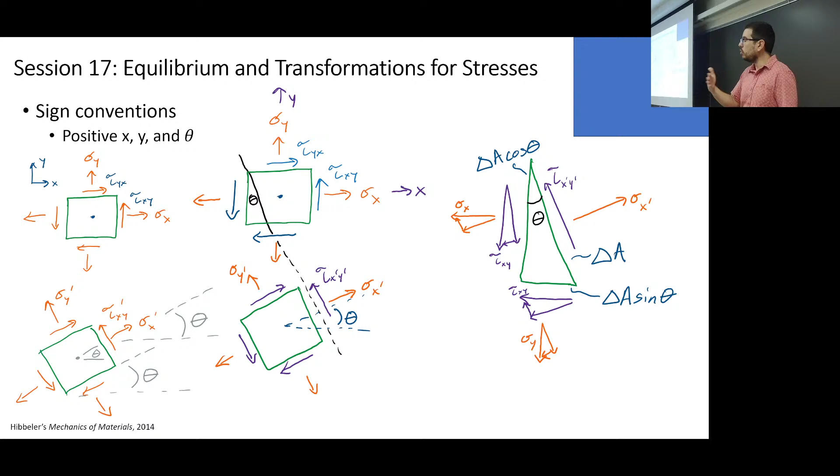We talked about these equations, this general form of plane stress transformation, and the three equations you can use if you do not want to do the method of slices. Today, or this week, in most cases, what you'll be able to do is not even think about these, but use Mohr circle.

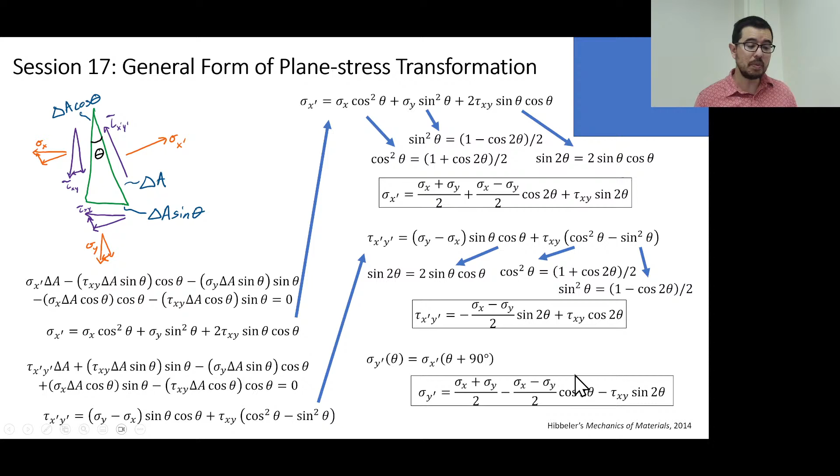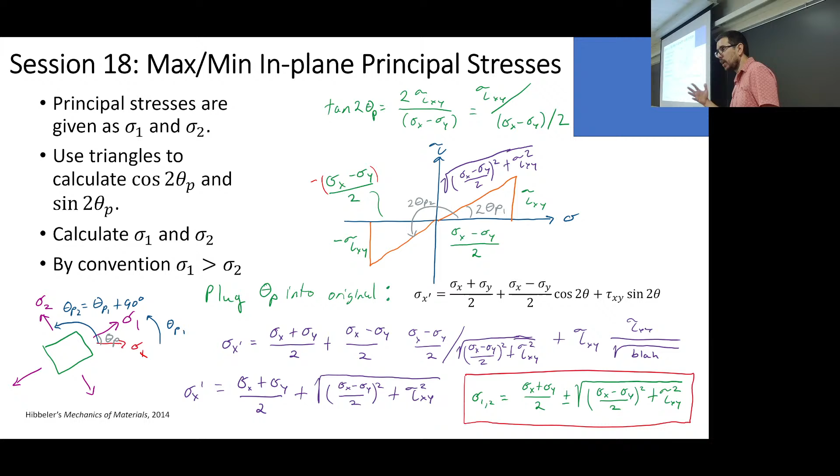We've also talked about the max and min in-plane principal stresses—in plane, big deal. We're going to talk shortly tomorrow about what happens in the 3rd dimension. It's very simple once we know how to use Mohr circle. But this is not the same thing as the absolute max or min for stresses. We're going to cover that tomorrow.

With Mohr circle, it goes back to someone named Christian Otto Mohr, before the 1900s, 19th century. Essentially this is a methodology, a graphical methodology based on geometry or trigonometry, to be able to visualize what happens to the state of stress for an element under rotation.

So it's a visual way to come up with rotations, and it's not too dissimilar from what you do in pre-cal or trigonometry, where they teach you the unit circle. It's like, oh yeah, now I know how to calculate the sine of 45 degrees, the sine of 60 degrees, the tangent of whatever. It's the same idea—I rotate an element and look at the unit circle. I rotate by some angle and look at Mohr's circle instead, and I can tell you what's happening to the state of stress.

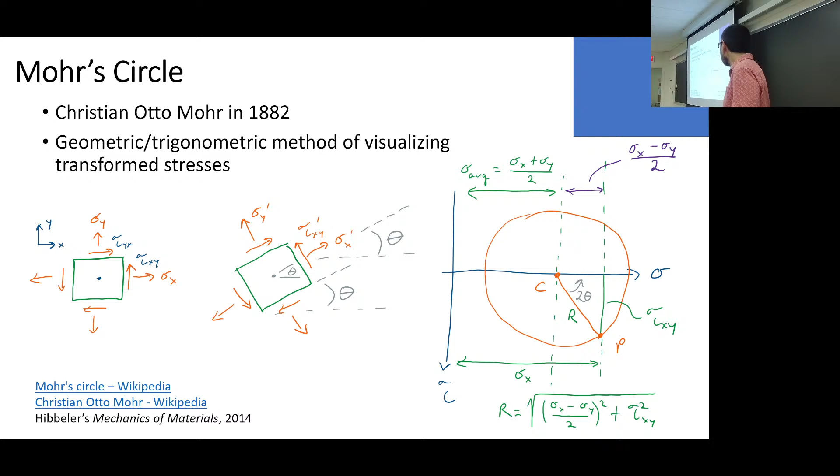So the derivation is actually not that complicated once we use the general equations that we have for sigma x to sigma x prime and tau xy to tau x prime y prime. So you start with two of these equations.

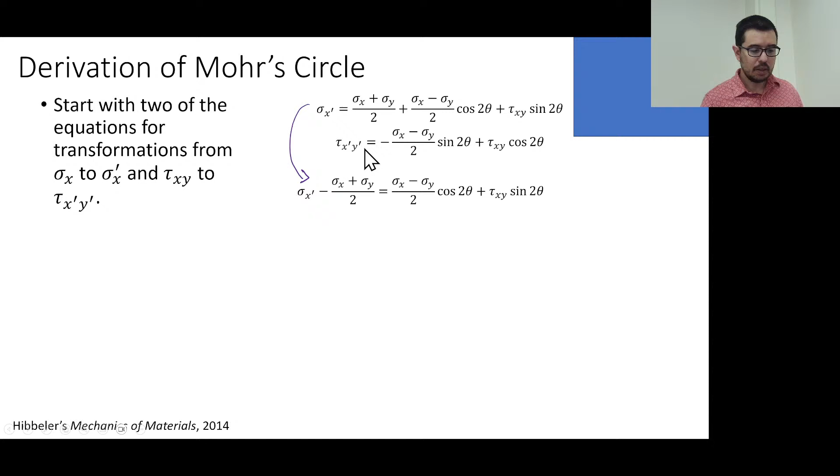There's one for sigma x prime, and there's one for tau x prime y prime. And then you move one part of this equation over to the left side, like you see here. So this is just using the first equation, and now we have this quantity over here and this quantity over here.

You square both of these equations and you add them to each other, and you get this big monster of an equation.

Now we can simplify this equation. You see that this expression and this expression right here, they knock each other out. Well, actually, no, they don't. There's some algebra that happens. They don't exactly knock each other out, but you can begin to see that we can simplify the expressions that we have here to get the following, with these cosine 2 theta terms, sine 2 theta terms, and things of that nature.

So this is the equation. And you're like, well, it's still an equation. What's the format? What's the standard form for a circle on Cartesian coordinates on an xy plane?

Forget what you see here. Just what's the standard form? X squared plus y squared equals r squared. Exactly, right?

And if I want to specify a center that's not at the origin, what do I do? So what you just did is x squared plus y squared equals r squared, right? That's right at the origin. So what do I do? How do I modify it? X plus or minus something squared. Right, so if I wanted it at 1, 1, it'd be quantity x minus 1 squared plus quantity y minus 1 squared equals r squared.

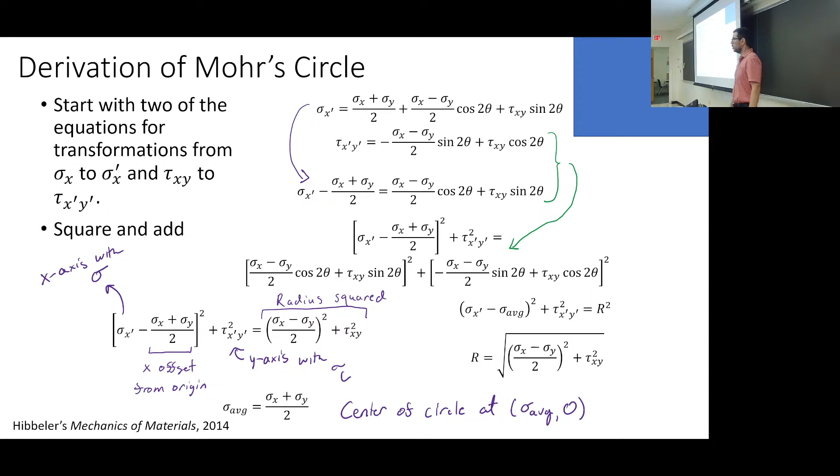We've done a bunch of work with equations, but we know that these equations do correspond to a circular geometry on Cartesian coordinates. So now, how do we relate this equation of a circle to a graph, and how do we think about these equations in terms of what we've been discussing?

Well, this is the original element, backing up here. This is the original standard, what I give you: the state of stress with an xy coordinate system, sigma x aligns with x, sigma y aligns with y. Tau xy describes the stresses parallel to the surfaces of the material element, and then I've got a theta, which corresponds to some rotation.

Now, the things that should be obvious based on the previous slide and our recent discussion: here is how we find the center. We take the average of just sigma x and sigma y, and that is where the center of the circle is, relative to the origin of the coordinate system.

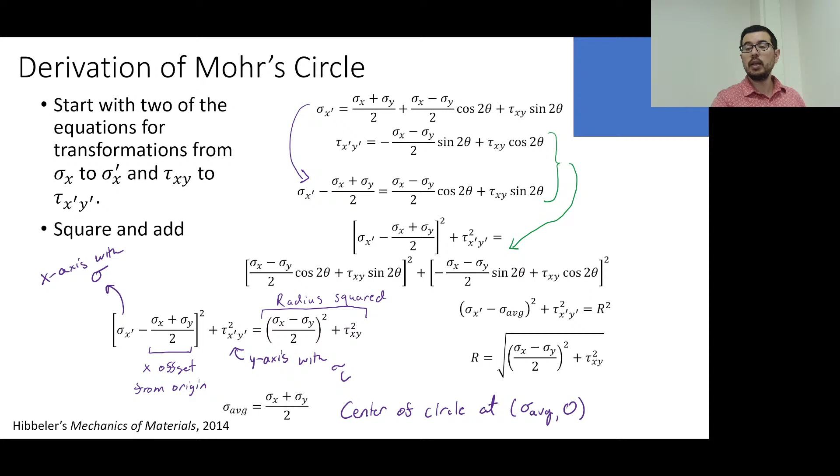We're going to go into more detail here in a minute in terms of the methodology. But one thing that hasn't been clear from these equations so far is where theta went. If we go back to the previous slide, there are thetas in our equations of transformation, and there are thetas when you do the slicing. So we've got to discuss where these thetas, or how these thetas, get used with Mohr's circle, right now.

Generally speaking, a counterclockwise rotation in theta, with the way we've shown to do things, corresponds to a 2-theta counterclockwise rotation on Mohr's circle. That's the way we do things. We still haven't exactly said what this point P is yet—we'll get into that in a minute when we talk about the methodology. But what we're saying right now is that counterclockwise rotation of the element results in a counterclockwise rotation on the circle of twice what it was. We're going to end up picking off points on Mohr's circle that correspond to states of rotation.

Now, if you look in different textbooks, you'll find that there are different conventions that people use. This is for your good-to-know file, and maybe to help us not get too confused, and to help us remember that if I rotate the element counterclockwise, I better go counterclockwise on Mohr's circle. But if you use a different convention, what are these conventions? We're talking about what we consider to be a positive tau xy, what we consider to be a positive sigma x, what we consider to be a positive sigma y, and also very importantly, what we consider to be a positive theta.

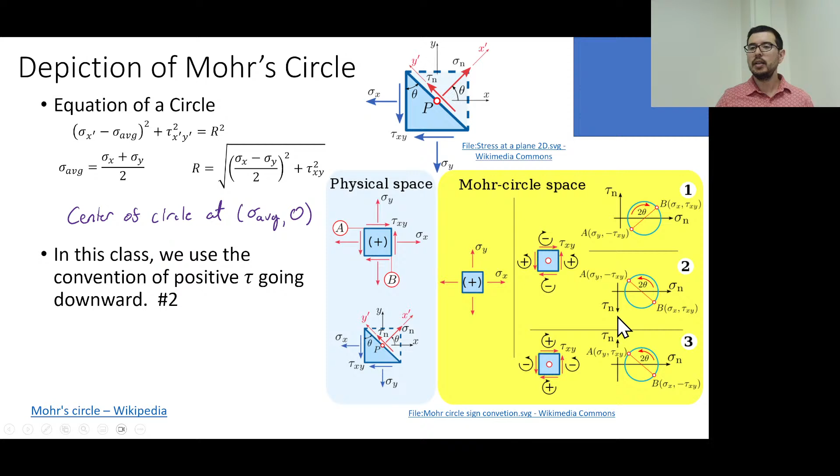So in convention 2, which I kind of skipped over, to keep counterclockwise with counterclockwise, we actually draw a positive tau downward. Do you see this little arrow here? This is downward, so this would be a positive shear stress down here, and this would be a negative shear stress.

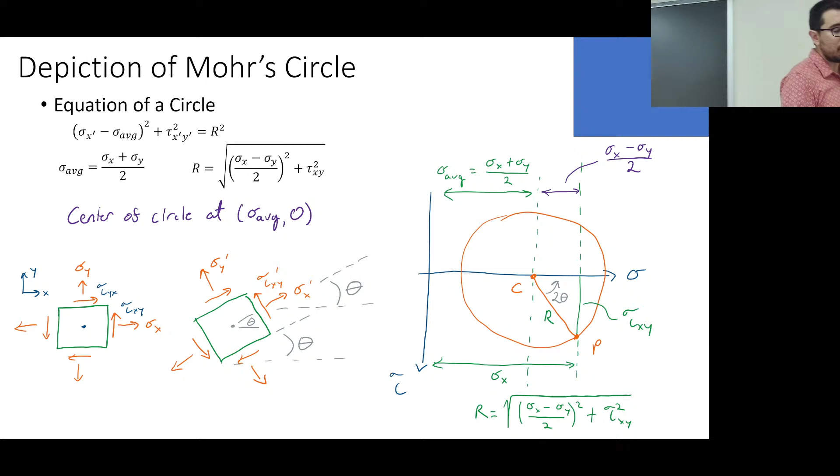You realize positive and negative shear stresses are not the same as positive and negative normal stresses. We talked about how compressive stress and tensile stress can have different failures based on their magnitudes—the sign can influence whether it's going to fail for a given magnitude, because materials behave differently under compression versus tension. But shear stress, not so much; the rod doesn't really care if I twist it this way or that way. Anyway, for our convention, tau is downward.

Don't worry, we're going to have lots of opportunity to draw more circles.

So here is a first pass. This is a homework question: if an element has sigma x equals 100 megapascals, sigma y equals 50 megapascals, and tau xy equals 10, what are the coordinates for the center of Mohr's circle, and what is the radius of Mohr's circle?

Even before you do any drawing, just tell me where the center is. So where is the center, folks? 75. Right, the center is going to be at sigma x plus sigma y divided by 2, the average of them, comma 0 - always comma 0. So like Eric just said, we take the average of 150, and we get 75. We should be careful like that. So that's where the center is for this particular case.

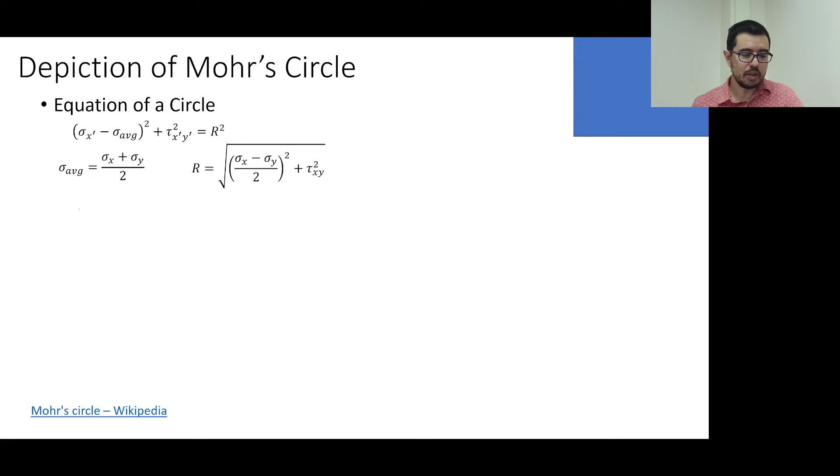What's the radius? Well, for this we can go back to this equation right here. We'll get into a more graphical way to do this, but if this is what you're given, and you don't want to draw the Mohr circle, which is what we're asking you to do at this point, you just plug this in. The radius is going to be equal to the square root of the difference of sigma x and sigma y - it doesn't matter if I do sigma y minus sigma x, it's just the difference because they're going to be squared.

So here in this case, I've got 100 minus 50, that's 50, over 2 is 25. So we've got 25 squared. And then this tau xy is 10, squared, so it's 100 underneath. Do I know what this is? Yeah, actually I do, I have it here. It's about 27.

So this is just to set the stage. We've got a circle that we're saying is at 75. So this is the center, at 75, 0. And the radius, it's smaller than 75, so it's not going to cross the origin. It's going to do something like this. And that's all we're doing at this point. I guess I can also draw the axes, which is typically how we draw them - we do a tau and a sigma.

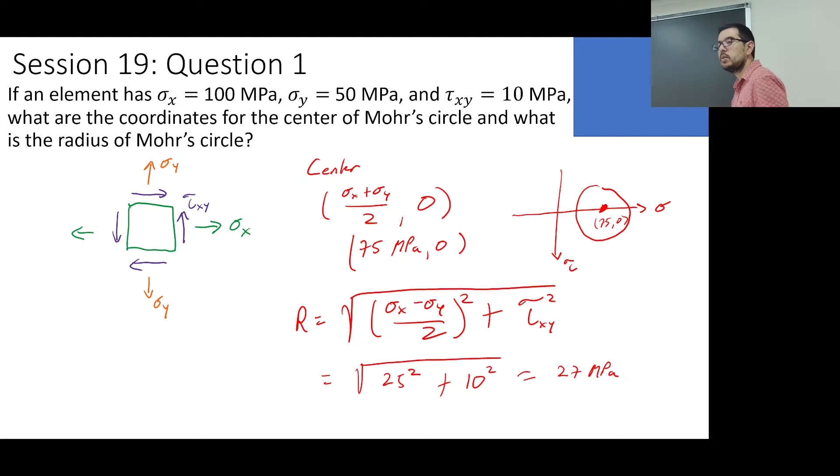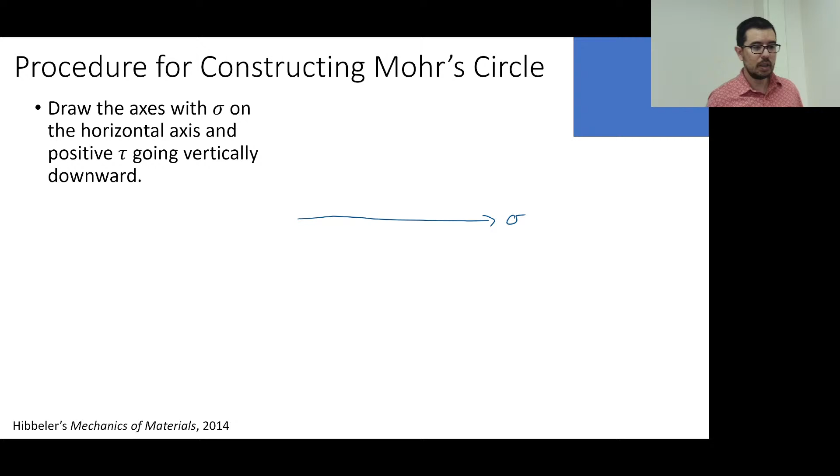So what is the procedure here? First, we're going to draw the axes, with sigma on the horizontal axis and positive tau going vertically downward. So we already said that. So we have sigma, we have tau.

Usually we know that they're going to be symmetric. The question is, do I draw a lot on the left side, the negative side of the tau vertical line, or do I draw a lot on the right side? It's kind of like when you're drawing your shear force and bending moment diagrams - do I need a lot of positives, do I need a lot of negatives? In this case, it's mostly: do I need to draw a lot on this side, or do I need to draw a lot on this side?

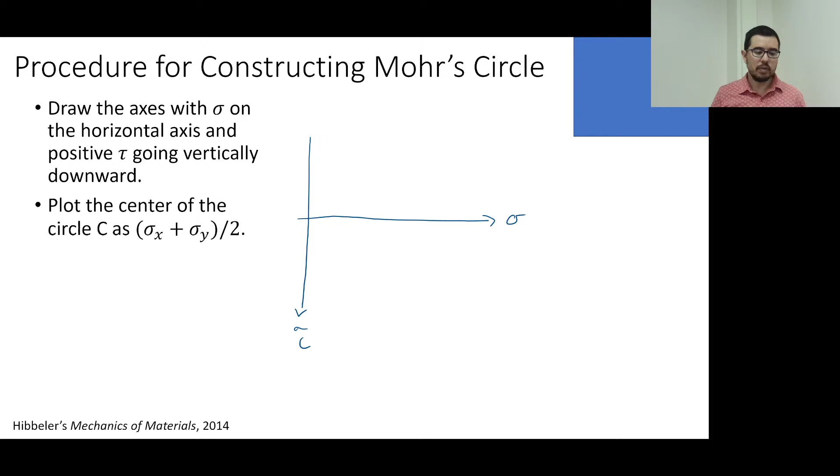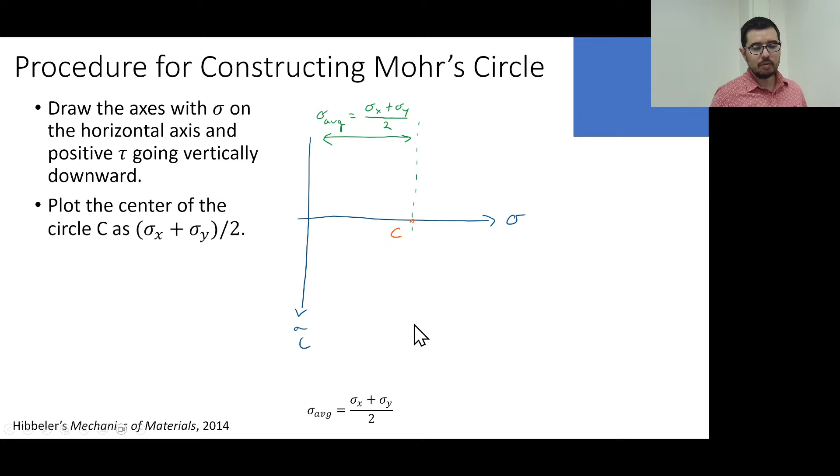Okay, the next step is to go ahead and plot the center of the circle. This is pretty straightforward, it's just the average - it doesn't matter what tau is. And it's beautiful: it doesn't matter what sigma x or sigma x prime or sigma y prime are, because this is transformation. I can take any sigma x prime and sigma y prime pairs, or I can take the original sigma x and sigma y. They all should give me that average, which stays constant - that's where the center of the circle is. So there's the average, and if you like, you can make a little dotted line like so. You don't have to do that - there's going to be many opportunities for little dashed lines and things we're going to draw.

Now this is the part that I didn't tell you yet. We plot a reference point. What is the reference point? Now we're saying, okay, you were given a state of stress - you were given sigma x, sigma y, and tau xy.

Typically, you're going to plot sigma x. You're going to ignore sigma y. We'll get into this, but you're going to plot sigma x and tau xy. So what does that look like?

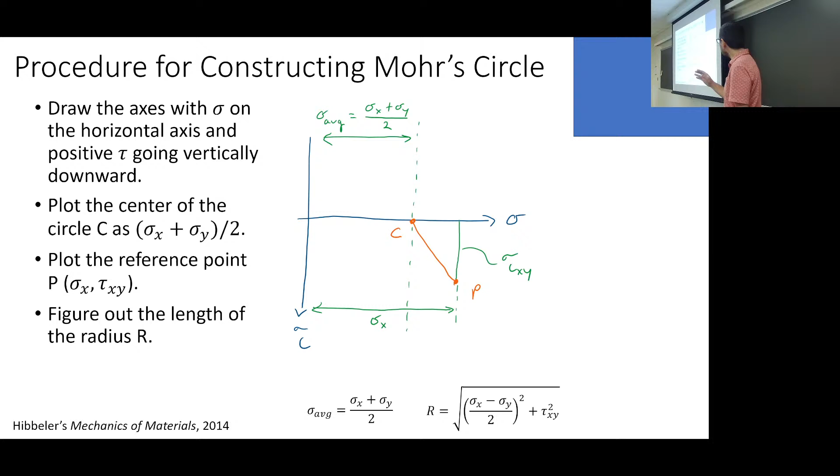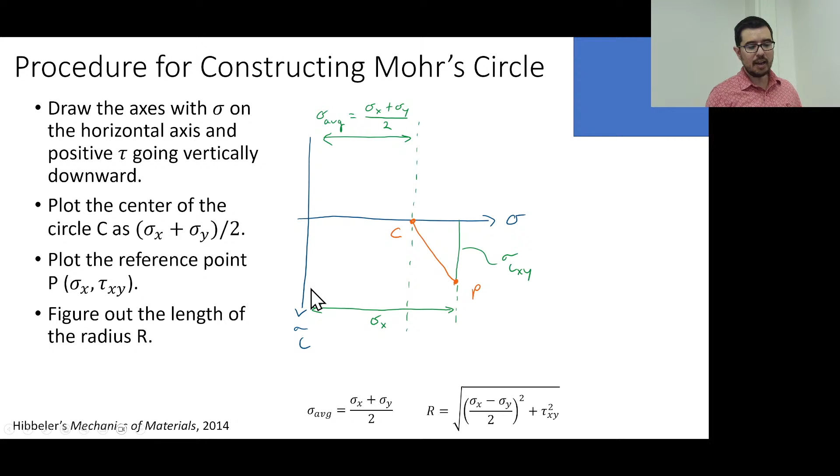This is what it looks like. This is the sigma axis, this is the tau axis. Each point on a Mohr circle represents a state of stress. In this case, I've pinpointed a state of stress on the circle corresponding to what was given to me as sigma x and tau xy.

We'll talk about this later, but anyone want to guess where would I plot sigma y, since I didn't plot it here? Where is sigma y on this plot? Yes, it's one radius away along the same line, so it's 180 degrees. So this is P, and if I wanted to call this Q out here, let's see.

Let me draw the rest of the circle first, and then I'll go back and talk about this. So, yeah, this is where sigma y would be.

We'll talk about that a little bit later in more detail, but just intuitively, what is the angle between x and y? Between any coordinate axis and another coordinate axis it was 90 degrees, right? So if 90 degrees on an element represents 2 times that, that means this point over here is 180 degrees from where this point is, and that's where we plot sigma y.

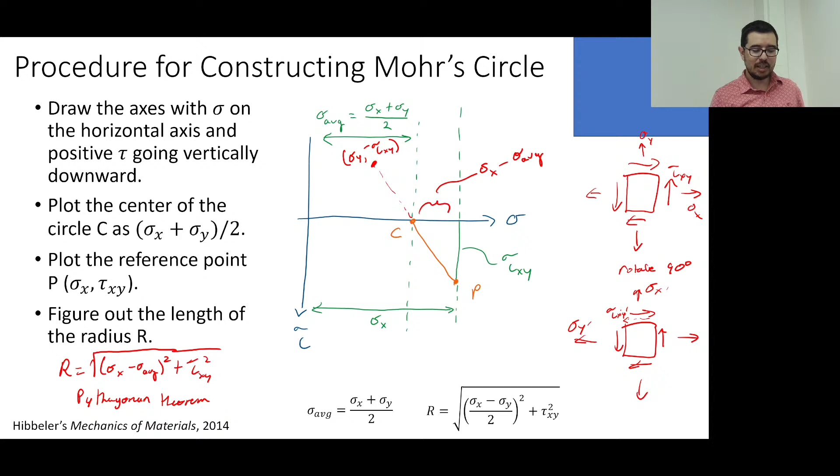Will you write these equations on your formula sheet? Of course you will, because that's what we do. But you don't really need to.

So what can we do with Mohr's circle? I jumped ahead again, and you can see I jumped ahead here too. So let's just erase it. Actually, I don't think it will let me erase it. That's okay, it's there.

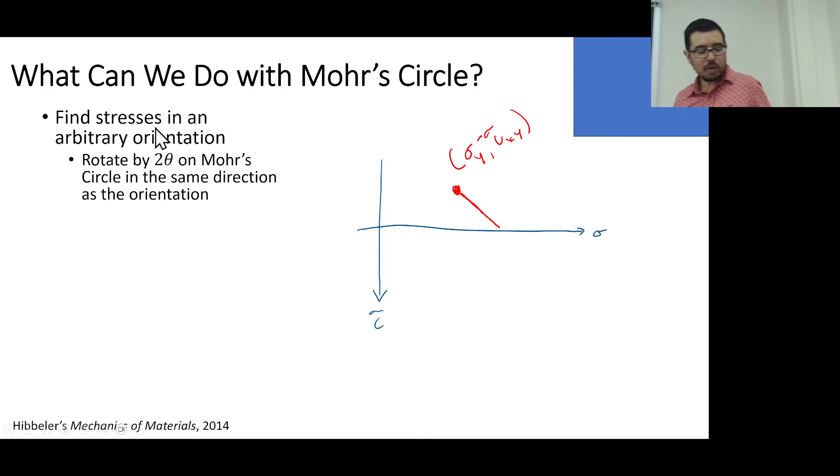We can find stresses in an arbitrary orientation. This is saying third method of figuring out the state of stress with a rotation. The first method was do the slicing, which you got to do yesterday. And then do use the general set of equations, which you got to do yesterday. And then a week from Thursday, you'll get to do Mohr's circle.

And we're saying that we rotate by 2 theta to get the same state of stress as if we were rotating the element. So here you've got the opportunity to write out your sigma x, your sigma y, all these things.

And what we're saying is, if this was your original state at P, and you have a radius r here, and now I tell you, go ahead and rotate by 15 degrees, what you do is say, if you told me to rotate counterclockwise by 15 degrees, the positive, then I'm going to rotate 30 degrees on Mohr's circle. That's where this 2 theta comes in, like this.

And then we're going to figure out what the new P prime is. This P prime corresponds to a new sigma x prime and a new tau x prime y prime, which are on the Mohr circle as well. Any questions? This must seem a little foreign unless you've been studying this, but do you have questions in terms of what we're doing here?

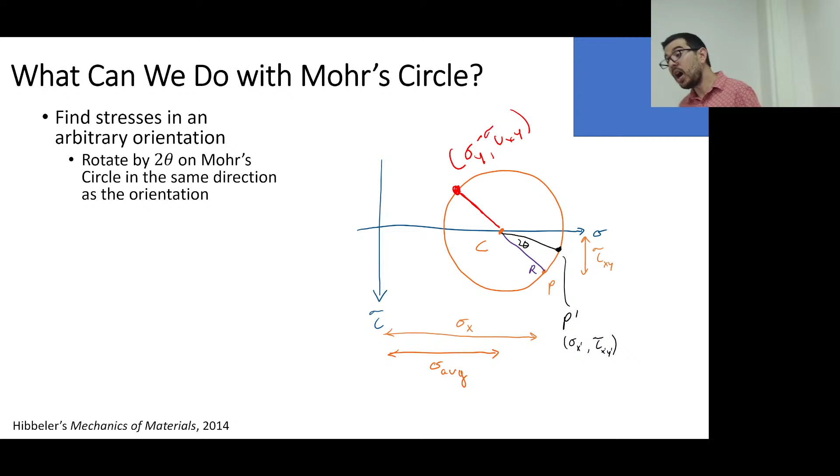Now, how do you figure out principal—okay, not principled, in the sense of I have principles. Hopefully, I have some principles. But how do you figure out state of principal stresses?

What do you think? What were principal stresses? What did we discuss? I know it wasn't covered on the exam, so it's not fair game, right? But you've done the homework on it now. When the shear stress equals 0. Yeah, when the shear stress is equal to 0. So when is the shear stress equal to 0?

Sigma max. Okay, so sigma max, or like you were drawing, when you're on the horizontal axis, right? Because the shear stress goes to 0. So we're going to have principal stresses that we can think of when we look at the horizontal axis, like this.

And we look for an orientation that would get us to that horizontal axis, and we call that rotation 2 theta p, because this p stands for principal. So we go like this, 2 theta p. And remember, I introduced this idea of sigma 1 as being the largest principal stress, and sigma 2 being the next in line. There will be a sigma 3 for the third dimension in a little bit. Tomorrow.

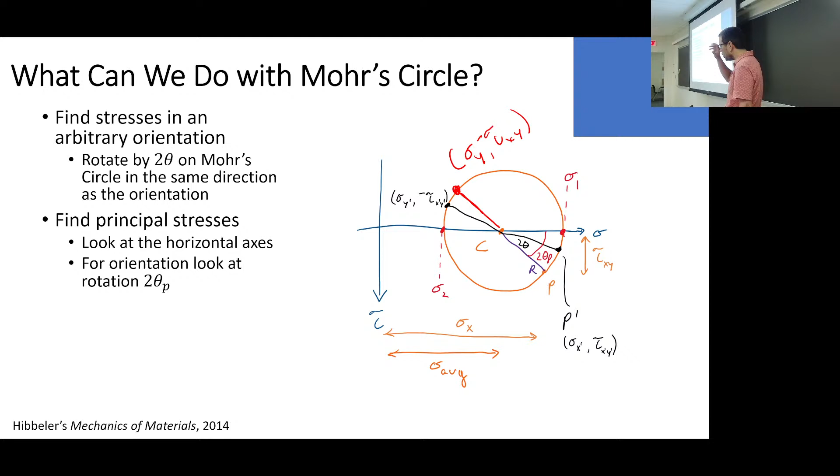This methodology quickly allows us to identify what the principal stresses are, if you know the center, without using an explicit formula, which we did give for calculating principal stresses, and which you hopefully used on the homework, or you made a graph and picked a point.

What is a formula for sigma 1? Radius plus the center of the circle. Yeah, it's just the radius plus the center of the circle. And sigma 2 would be the center of the circle minus the radius. Right, over here. When we say radius or center of circle, we're talking about the x component.

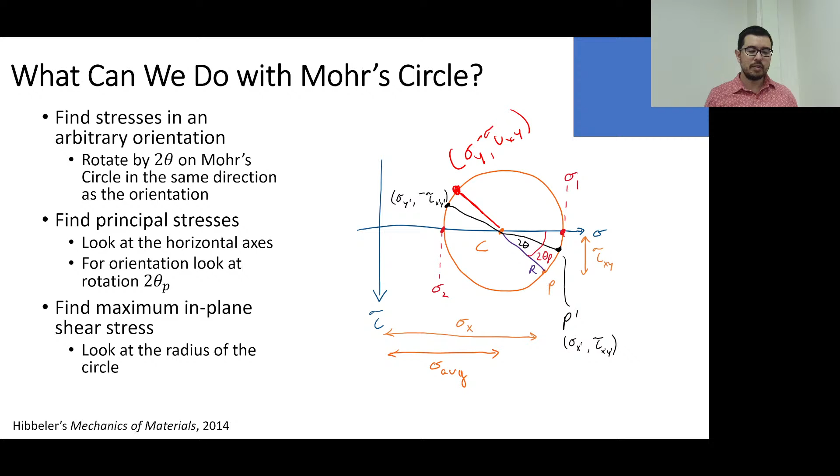Foreshadowing, maybe not enough. How do we find the maximum in-plane shear stress? It's the radius, correct. Do you see that? Because the radius is going to dictate when you have a maximum. So here and here, this is going to be the maximum positive shear stress down here, because that's positive down here. And this one corresponds to a maximum negative, or most negative, shear stress up there.

But again, they're going to be 90 degrees off from each other, which corresponds to 180 degrees off from each other in Mohr circle world. Or it can correspond to tau xy max and minus tau xy max, just like we were talking about. Previously we kind of glossed over it, but let's talk about it again. 180 degrees will give us a sigma y prime, and it will also give us a minus tau x prime y prime. You see that?

So this is for any state. If this was p, this would be the sigma x comma tau xy. And so I go over here, this is the sigma y comma minus tau xy, 180 degrees off. What's 180 degrees? It's this purple line to this poorly drawn afterthought on the slide, red line here. So this is supposed to be 180 degrees. And if I go to this, this is even worse, and this was done beforehand.

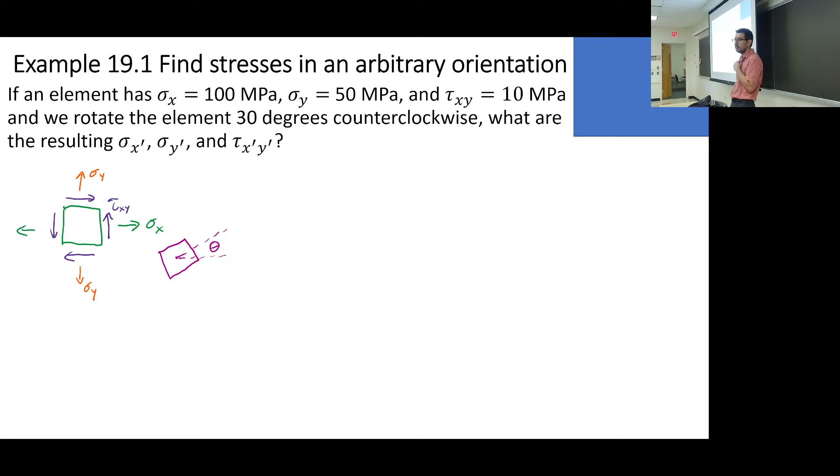Rotate the element 30 degrees counterclockwise. So what do you need to do? Rotate it 60 degrees. So we need to rotate it 60 degrees, and it's probably a good idea to figure out what the angle was before we rotate it. You don't have to, but it helps.

So what's the angle we're going to be looking at? Well, the angle is going to be based on what? How would you figure out the angle, the original angle for the state of stress?

This is kind of fun, we're just talking it through, not drawing yet, we'll draw it in a second. But how do you figure out the original angle? We do it inverse tan of the sigma x and... no, not sigma y, the tau xy. So you're gonna have the opposite side being tau xy, and the adjacent side being sigma x. But there's a catch.

What's the catch? Well, it really corresponds to a 2 theta on the Mohr circle. So what you're going to do is draw it, and it is in fact that angle. So the inverse tan of tau xy divided by sigma x, whatever that angle is. But then when you go to the 30 degrees, I think someone already said it, you actually go 60 degrees to the new location, because it's 2 theta.

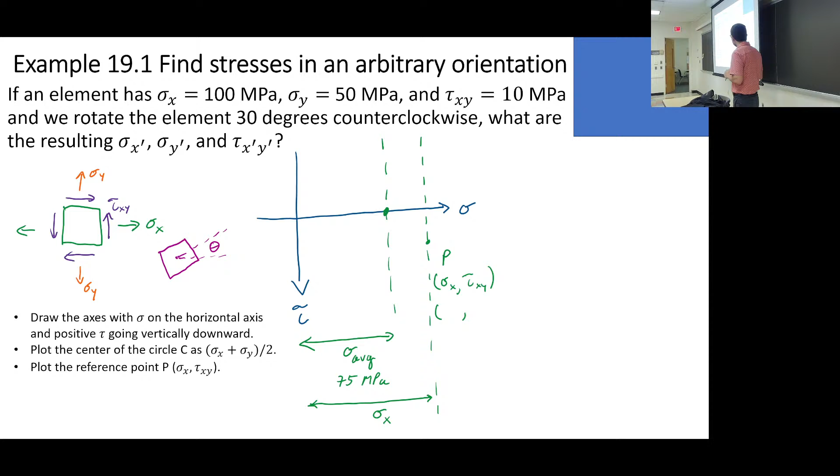So here we go. We draw the axes. We plot the center of the circle like that, and Andrew, you said it was 75. Good. We plot the reference point like so. We said it was 100, 10.

And then we figure out the length and the radius r. We'll figure out what radius r is. We draw the circle. And we have, I guess this is the same one as we got before, 27 megapascals.

And then we need to rotate by 2 theta. So this is true, right? So we can rotate by that 2 theta to figure out where we are. And again, I'll argue that we need to know what that original angle is, so that we know where we went.

So phi is that original angle, and that's going to be the arctangent of the tau xy over, sorry, not sigma x, it's sigma x minus sigma average. Sorry, I said that wrong, but now we see it, right? It's the adjacent side, the sigma x minus sigma average. Figure out what that is, then we say, okay, we're going 2 theta, so we're going to end up being 38.2 degrees, is that right?

Above there, okay, we'll call it gamma. That's 38.2 degrees. And then we already know our R, and we can figure out what our new adjacent component is going to be with the cosine of that. So the sigma x prime minus sigma average. And we do that out, and that's 96. And the tau xy prime, that's just minus r sine gamma. And that's because now we're above, and that's a negative term.

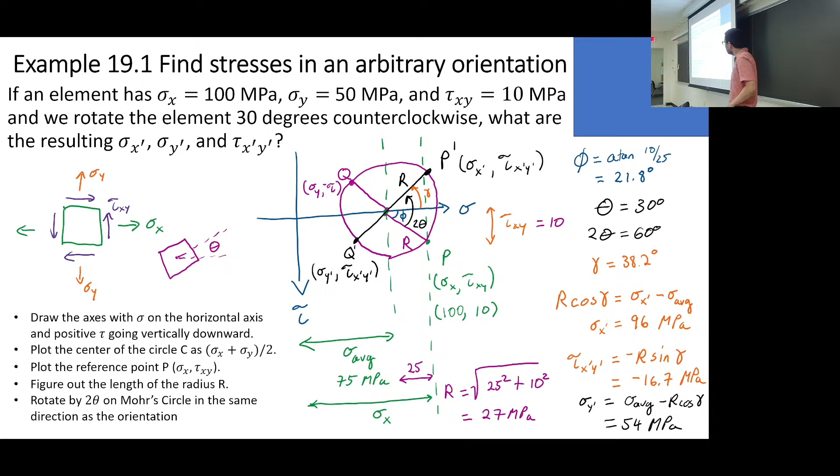Is it, if you have the transformation calculations programmed in your calculator, or you have it in Python, and you just have to plug in sigma x equals this, sigma y equals that, tau x equals that, and then angle, on a tau x prime y prime, sigma x prime. Is it that easy? No. But can you do this with some intuition? Does it make you feel good inside? Maybe, right? Maybe.

So again, we know that this little phi we defined was 21.8 degrees, and we got to rotate 2 theta p, right, is the amount of rotation that it takes to get to there, and it's essentially equal to phi, and that was arctangent 10 over 25. So 2 theta p, or theta p, is just half of that, 21.8, half of that. So we get that we go to here, and this theta p, that's the actual rotation the element has to rotate, right? So if we go back to this little box on the left, this was the original state. We don't rotate this element by 21.8 degrees, we rotate it by 10.9 degrees.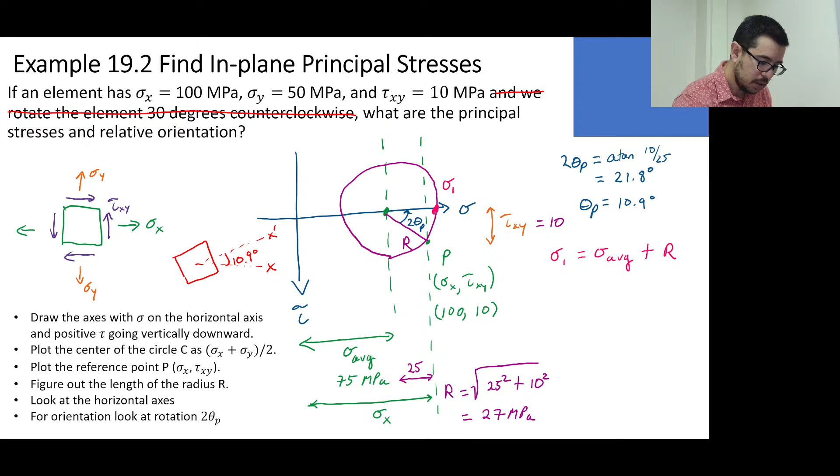And like, so like what we're saying is like this got rotated, and these things are kind of funny to draw, right? But you could draw it like that, and you say like that, right? And this is 10.9 degrees, right? And this is the new x prime. This was the x. Okay, this is the new y prime, and this was the original y, like that.

Okay, so now figure out what magnitude is for sigma 1. Well, it's the sigma average plus the radius, so that's not that bad. And the sigma 2 will be the sigma average minus the radius. So sigma average we said was 75, and the radius is 27. So 75 plus 27 was this. 75 minus 27, that should be like 48 or something like that. And that's what we see there. And whoops, sorry, that's that.

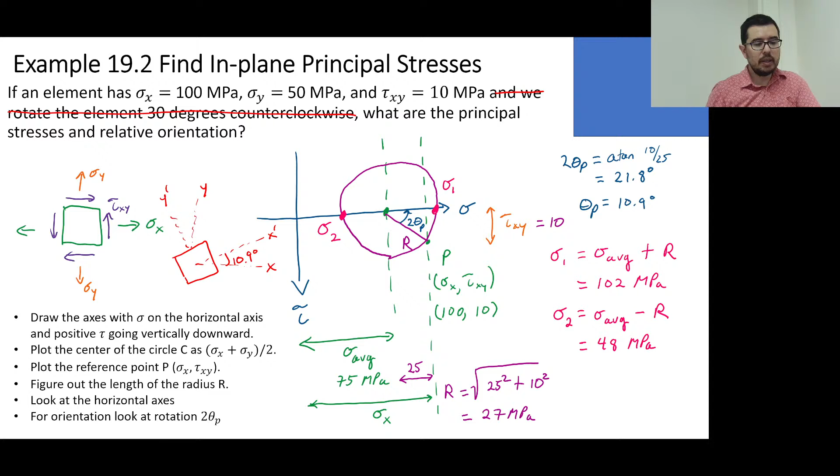If we're going to figure out the maximum shear stress, okay, they're good. I did delete that mistake. What is the maximum in-plane shear stress and relative orientation? So here we got to figure out, I want to rotate to get to the top or the bottom. And now I'm going to rotate, if I want to get this line to here, to the maximum positive, I'm actually going clockwise on Mohr's circle, which means I'm going to go clockwise with the element as well.

So the maximum in-plane shear stress, that was the easy one. As Eric said a few minutes ago, that's just the radius. The angle is a little bit trickier, because we've got to go with this 2 theta s now going this direction to get to this location. All right, and we can say something like that.

So what is this? What is this going to be telling us? Well, we know that the radius is this, and the x component is the sigma average, right? So those things are pretty straightforward. Q prime is also pretty straightforward. And these are the values. Whoops.

Okay. Did I not say the relative orientation? Did I not do this? Oh, come on. Well, let's do it. We got to do it because we can do it, right? So what did we say? We said it was like 21.8, right? So the phi is 21.8 degrees. Okay, so we should do this.

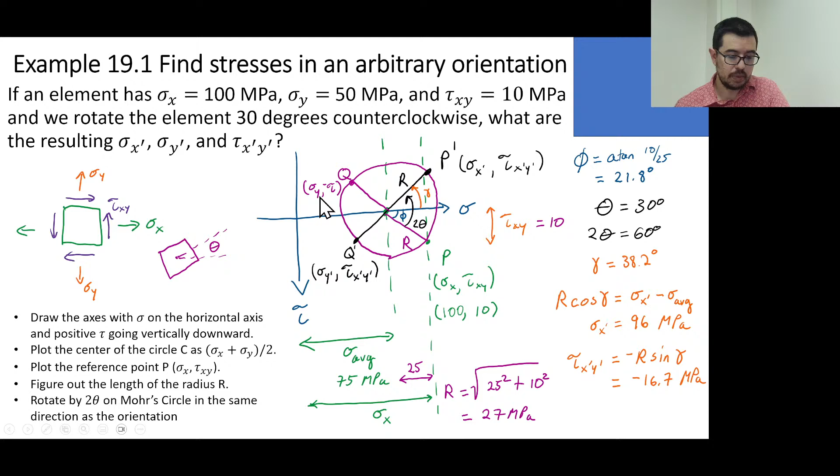What about sigma y prime? It's negative 75. Ah, no, good—it's still 75. Okay, so this one over here, it's still a positive sigma, right? Yes. This, for this going to like this state, right? It's still going to be a positive sigma y. So this is going to be like that, which is also going to be like that.

What's that? Any questions, comments, complaints, concerns? Okay, so...

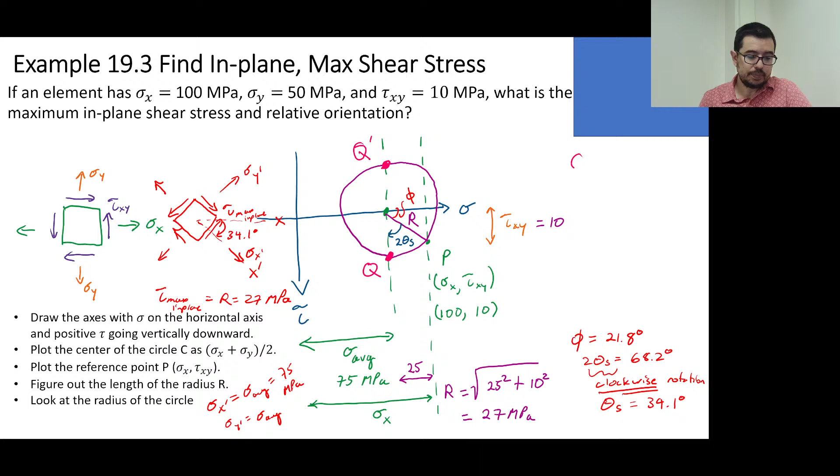Element rotation of 90 degrees on Mohr's circle. We already covered this—nothing happens with the lines or with the arrows, but something happens with the coordinate system, so we need to keep those things straight. And you see that sigma x prime is going to be equal to sigma y, we already kind of did all this. Sigma y prime is equal to sigma x. Tau x prime y prime is going to equal minus tau xy. And on a sigma-tau plot for Mohr's circle, we can draw this like this. We did a 90 degree rotation of the element, which corresponds to a 180 degree rotation on Mohr's circle. Again, we kind of already covered this.

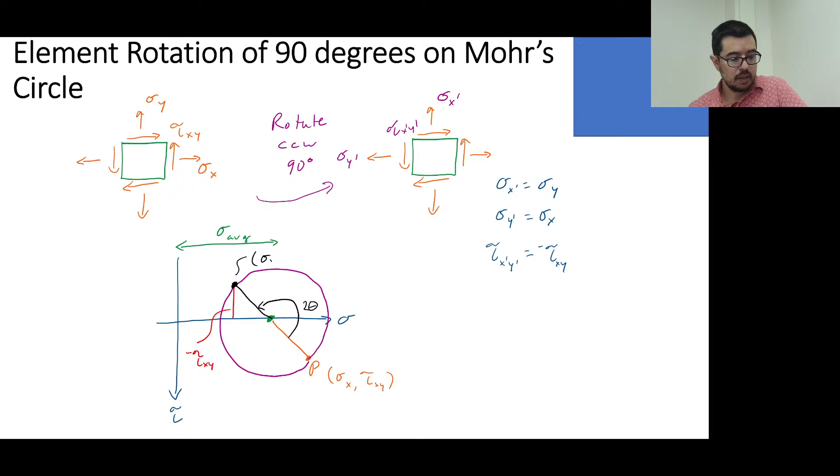Okay, so here's question number 2 on the homework. If you have an element that has sigma x equals 10 megapascals, sigma y equals 50 megapascals, and tau xy equals minus 10 megapascals, use Mohr circle to determine the larger in-plane principal stress.

Here's the thing to think about: since they give you a tau xy that's negative, that means you're actually above the sigma axis. So for determining the larger in-plane principal stress, you want to rotate clockwise to get to this point down here. That's all, so it's going to still be just sigma average plus r. And if you had drawn it wrong, you would have gotten the right answer anyway.

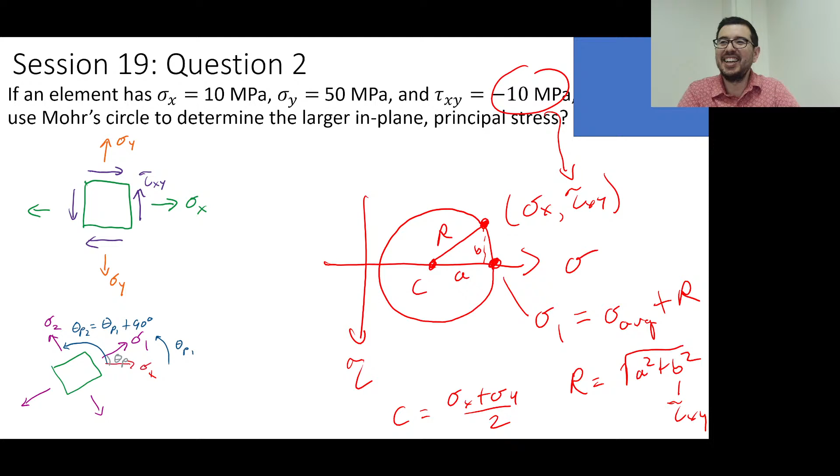But we want to try to draw them right. Okay, for this one, the transform to state of principal stress, the angle of rotation is required. So you could say, oh, I can go up here or I can go down here. This is the shorter direction to go. If you go this direction, this is going to be the minus tau max. If you were to go down this way, this would be positive tau max. So just keep track of which way you're going.

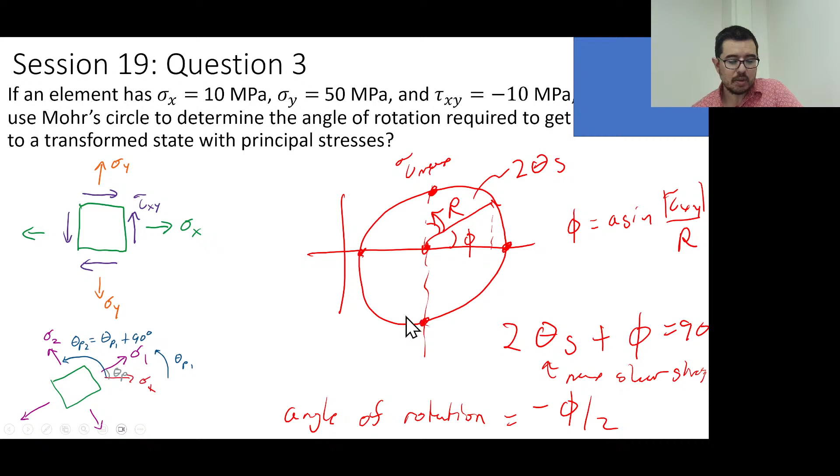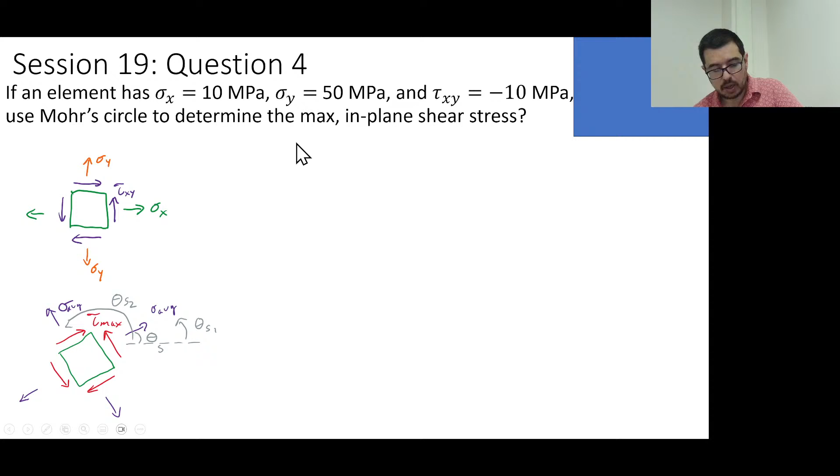And then question 4, you're going to use Mohr circle to determine the max in-plane shear stress. So that one is just the radius.

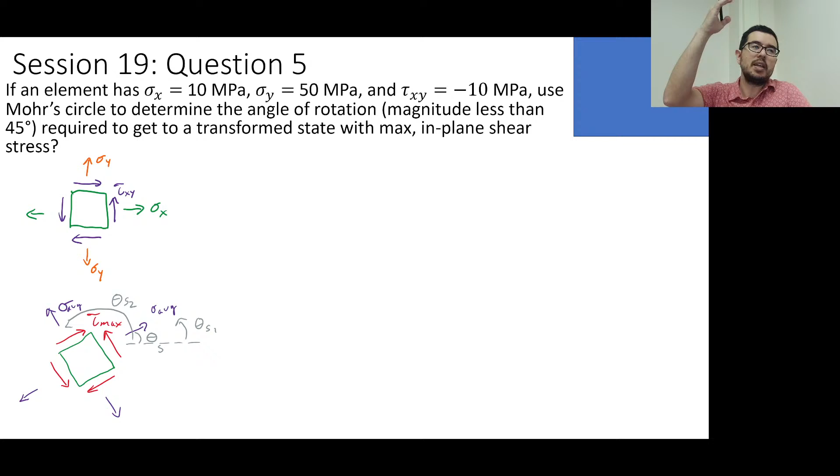And if an element has that, use Mohr circle to determine the angle of rotation, so magnitude less than 45 degrees. Since it's negative, you're going to want to move so that you're above, to the most negative, because this started out negative.

So those are some problems you get to do. We get to understand Mohr circle a little bit more clearly, and then we get to do some examples.

Mohr circle, we already discussed what it can do. It can help us find the principal stresses, it can help us find the maximum in-plane shear stress, and it can help us find the angles. When you take DMC, you're going to use Mohr circle. If I'm teaching it, I probably will never ask you for the angle of rotation, but I will ask you, you will need to know what the maximum in-plane shear stress is. You will need to know what the maximum normal, the principal stresses are as well.

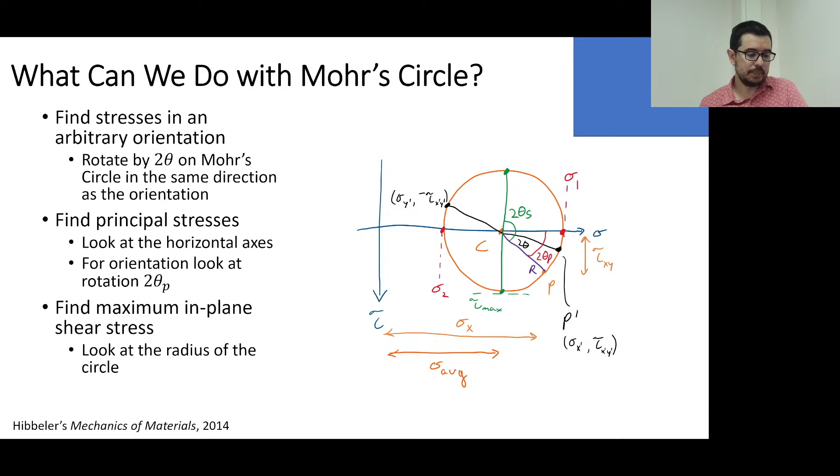Now, if we think about our uniaxial loading, this is kind of like the epitome of our romantic relationship with mechanics. We love this test. We're going to go and do this test in a few minutes, we're gonna have time, we're gonna go to the lab. We think, or we try to think, that for our linear isotropic material, the tensile test can tell us everything we need to know. Well, does it kind of? Yeah, sure, it tells us a lot.

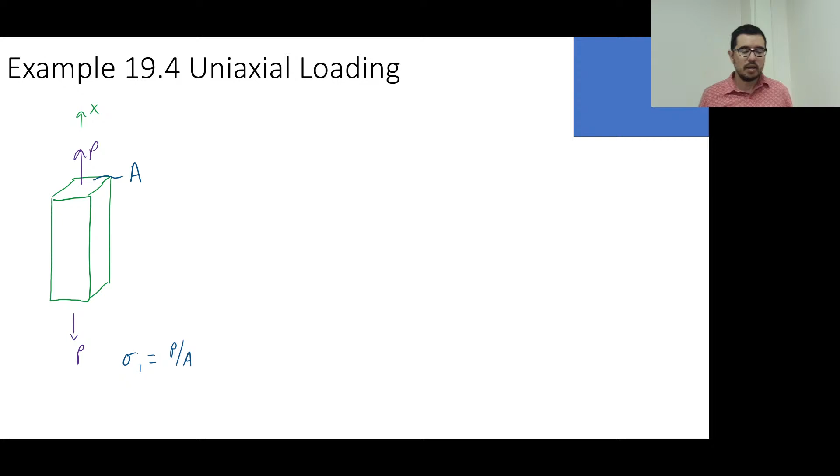What does this thing look like on a Mohr circle, though? What does the uniaxial load look like? Well, this is a uniaxial test. What are the normal stresses? Well, it's just P over A, right? The other two directions are 0. What are the shear stresses? Zero.

In that particular rotation state, so what does the Mohr circle look like? Well, this is what the state of stress looks like. Sigma 2 is at the origin, sigma 1 is, well, at P over A. The average is the center of the circle. So people, what do you think? Does this look like it? This looks pretty good, right? This is what Mohr circle looks like, right? Yeah, okay.

Now, where is that point? Where am I? I'm over here, right? I'm on this point right here. This is where sigma 1 is, right? And this is here, so I'm in a state of maximum in-plane, maximum principal stresses, maximum in-plane normal stresses. So what is the maximum shear stress, though, that this material is actually experiencing?

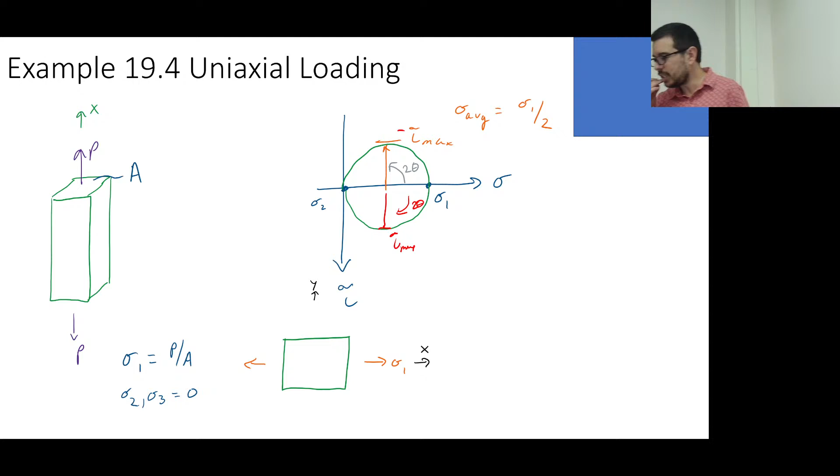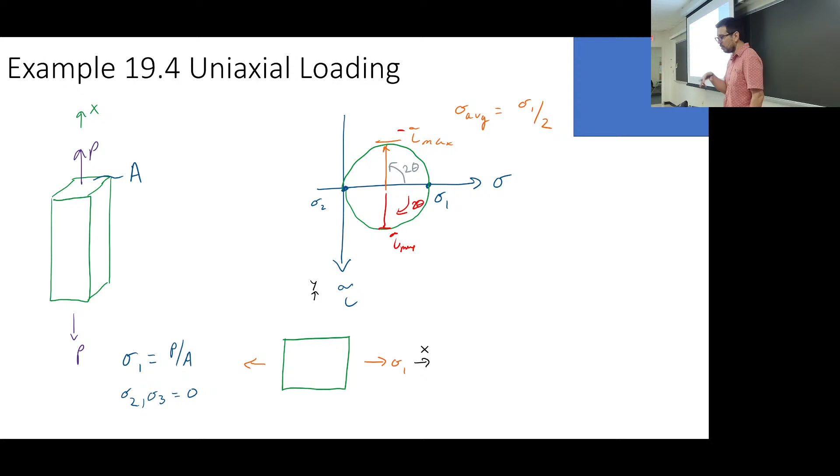It's one of the reasons why I continue to get confused about this is because, once again, what did I learn, or what did I have to teach, when I was an undergrad I had a different book for mechanics of materials. And then when I started teaching DMC, I taught it before this class, and we used Juvinall's book, and they use a different convention. So when you look at DMC, if you use Juvinall's book, tau goes up. So whenever I draw those Mohr circles, I'm like, all right, go up. But I don't care about the orientation so much because the orientation will be flipped. So when I say orientation, I mean the thetas would be going the opposite directions.

Anyway, the tau max, as you said, is sigma 1 over 2. It's the radius, it's the average, okay? And tau max, you could say, depending on which way you go, 45 degrees, either way, okay?

In this case, I rotated, so you see this? I rotated clockwise. So that means I went from this state to this state. So I went from having a sigma x that was here to a sigma x prime up here. I went from having a sigma y that was 0 to a sigma y prime that is now a max. Everyone see that? So I went from this state to this state.

So what happens? Sigma x prime, y prime, I now have my shear stress. So tau max I drew in the opposite direction, okay? Or I could have drawn it in the same direction that I normally would have for my x prime and y prime, but just said it was negative. Can you see that? The convention would say this is the tau x prime, y prime that's positive, but it's now drawn the opposite direction because it's negative, because it's up here.

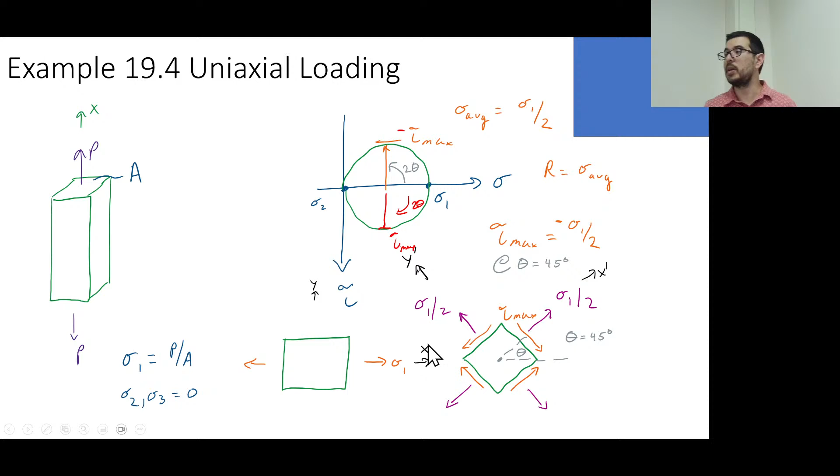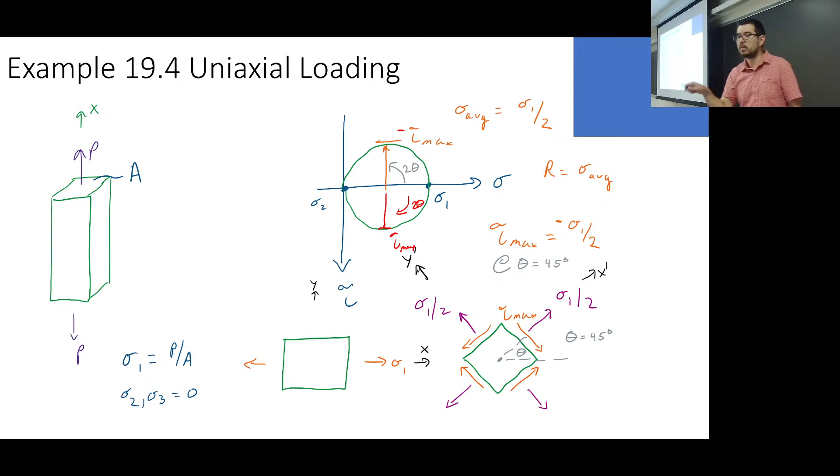This is the state of maximum in plane shear. And when you get maximum in plane shear, you don't necessarily get that the normal stresses are 0. In a state of principal stress, you get that shear is 0, but it doesn't work the other way.

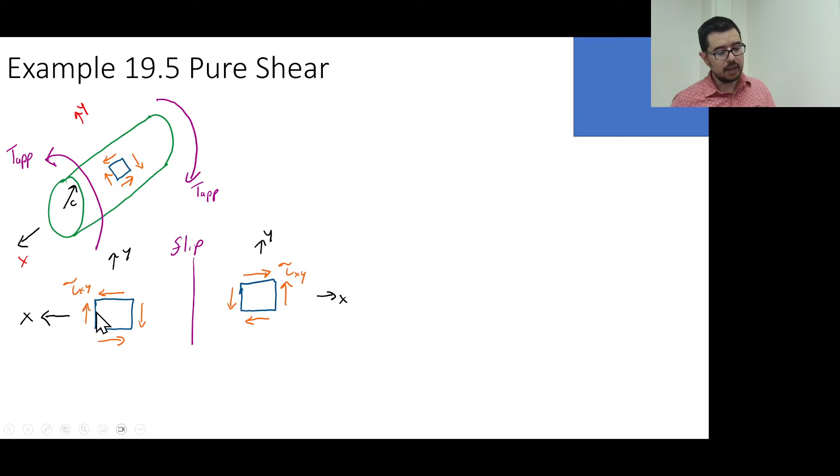And we can say that if we were to flip this—let's just rotate. Okay, flip actually works too, I guess. Yeah, it's fine, we can leave it as flip because it's fine. But here, we flipped it over, and now this is x over here and y over here. Yeah, it's a flip. So then when we do that, well, the tau xy, we already know from TC and J that this is what that quantity is.

And we can figure out what the magnitude is, let's say, of the state of principal stresses. So what are sigma 1 and sigma 2 here? We can figure this out by doing some more work with Mohr circle. So we started off where? Well, Mohr circle is at the origin because there are no, sigma x plus sigma y—sigma x is equal to 0, sigma y is equal to 0 in this case. So that's going to be 0, so it's just a Mohr circle at the origin.

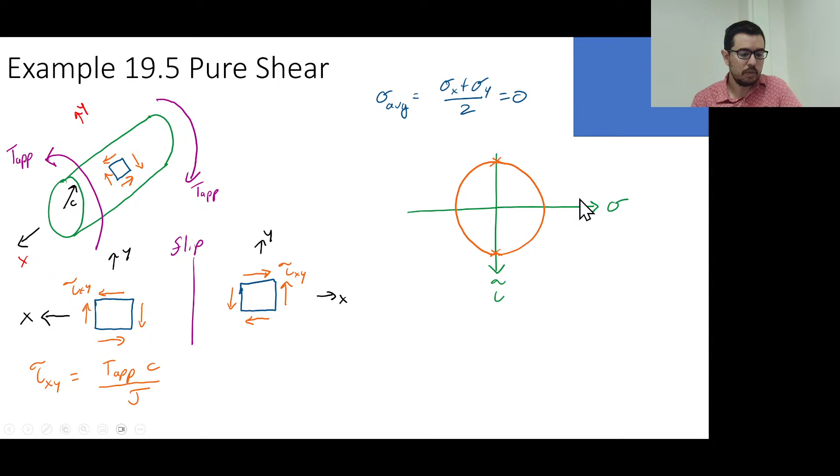And we're in a state of maximum shear stress, right? That's what this is, because it's pure shear. So in that orientation, it's maximum. And sigma x and sigma y are 0. In general, when sigma x and sigma y are equal to each other, you're going to have a state of maximum in-plane shear stress.

So we're up here. How do we get to our state of principal stresses? We've got to rotate to the appropriate location. So that's what we do. We got to either go here or here, like that. And this is just the radius to get to there. Yeah, so this was the original state.

Right. Okay, then we rotate over here. And we know that now our sigma 1 is equal to tau xy, or tau, and sigma 2 is equal to minus tau. The rotation was 45 degrees of the actual element, but 90 degrees on Mohr's circle. So this is what that state looks like.

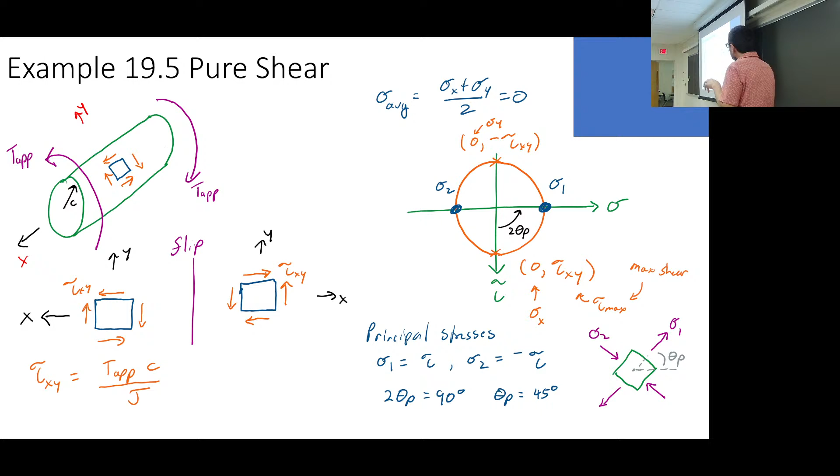Okay, any questions on this? These are two important cases, right? We've now related uniaxial testing to a maximum in-plane shear stress. We've related a pure shear to normal stresses that could develop. So if you have material that fails because of normal stresses, even though it's under pure shear, you can figure out if it's going to fail or not. If you have a material that's under uniaxial loading and it fails because of shear predominantly, you can figure out what the equivalent shear stress is and figure out if it's going to fail or not.

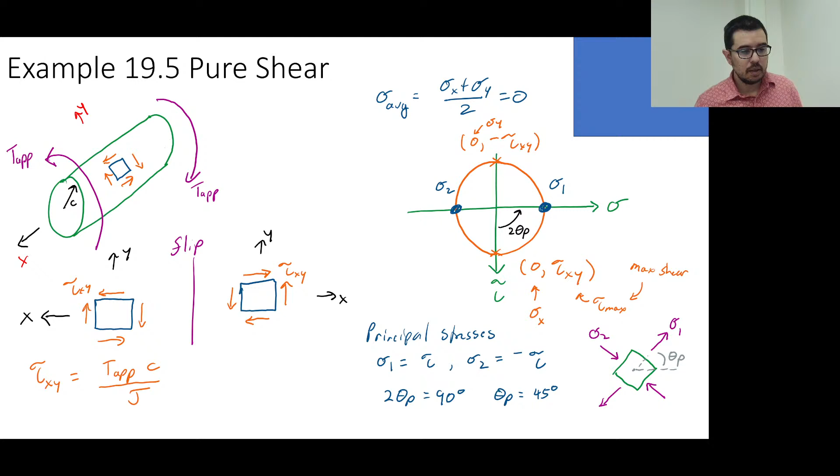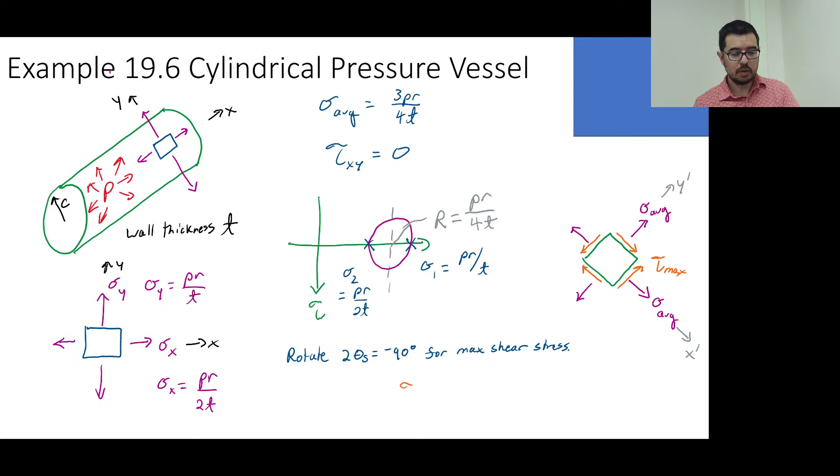And we do that, and we get the following. So again, pressure vessel, we didn't think, hey, there's no shear stress here, it's just happiness, we have normal stresses. No, there are equivalent shear stresses involved with a cylindrical pressure vessel.

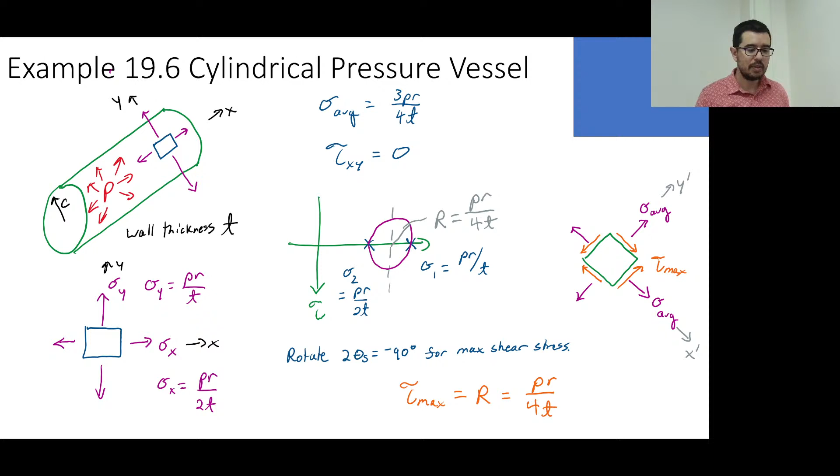But what happens for a spherical pressure vessel? What are the sigmas for a pressure vessel? Everything's PR over 2T. What are the shear stresses here in an original state, or any state? So what does Mohr's circle look like?

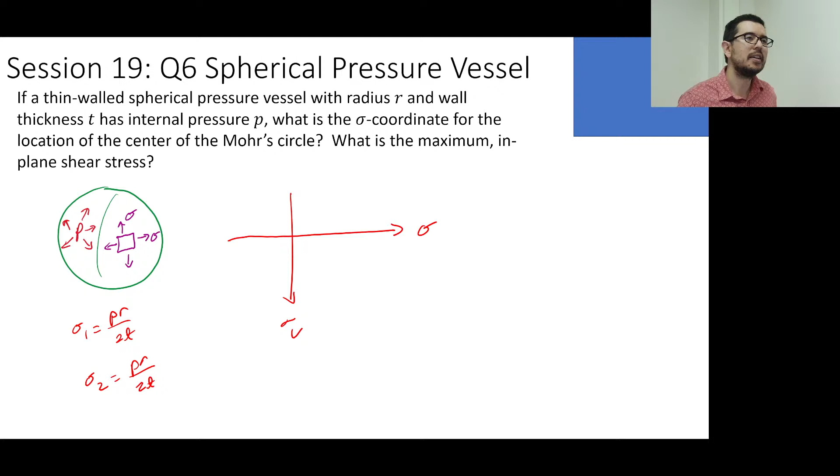PR over 2T. One half on either side. So here's tau, PR over 4T. So you just told me that we have sigma 1 equals PR over 2T, sigma 2 also equals PR over 2T, tau is equal to 0. So let's say, all right, so the average, what is sigma average? So we have PR over 2T, PR over 2T, right. Okay, so here's sigma average.

Now plot the point. Let's plot point sigma 1, tau. Where is that? Oh, so first off, this is the center, right? Okay, where's sigma tau? It's right there. It's not, it hasn't moved. It's still right there. So for this case, the entire Mohr circle is a point. There's no shear stress. The spherical pressure vessel.

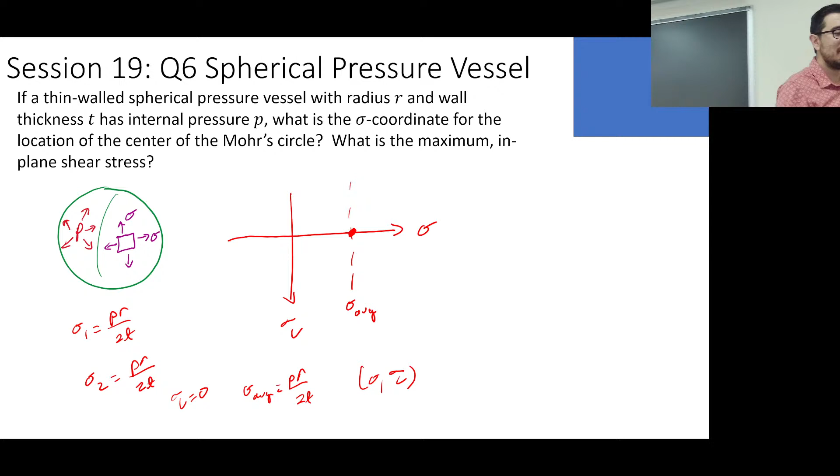Okay, it turns out that's not completely true. We'll talk about that tomorrow. When you talk about absolute maximum shear stress, it's different. But the maximum in-plane shear stress is 0. That's fun. So this is kind of a fun problem that I put on exams that gets people upset.

All right, so what did we do today? We talked about the derivation of Mohr's circle. We talked about a method of constructing Mohr's circle. And we did some examples.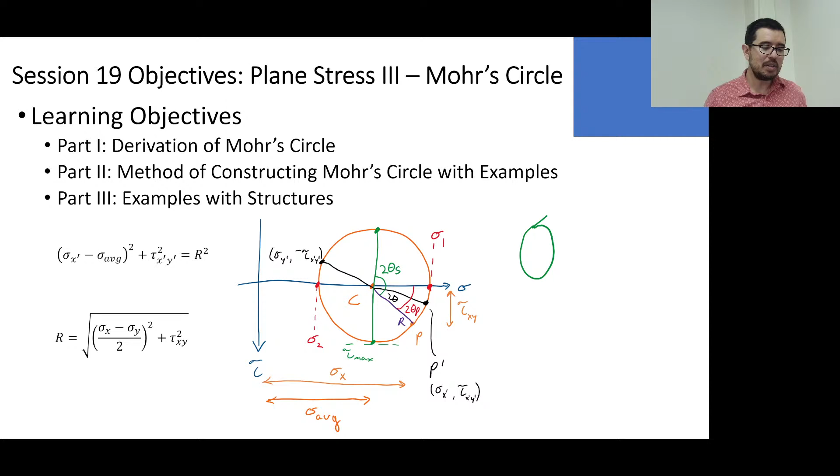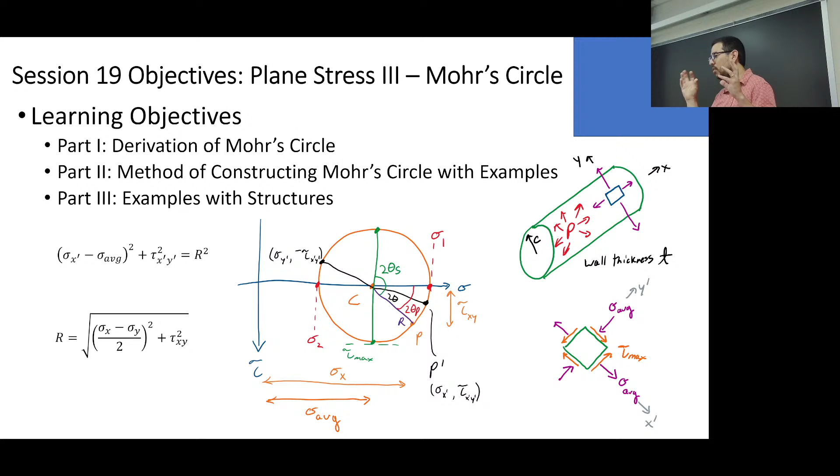Welcome to mechanics. You now know Mohr's circle. Well, you're now going to be examined on Mohr's circle. You're now responsible for knowing Mohr's circle. So you've now crossed this beautiful rite of passage. And it's a useful tool that just shapes now how you think about, is it going to break or not? That's what it does. Thank you.